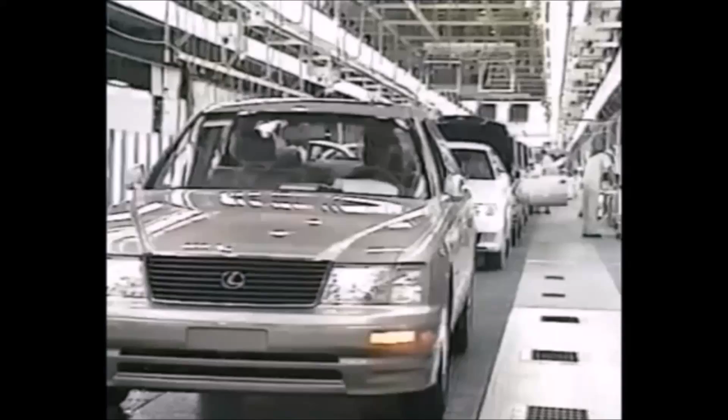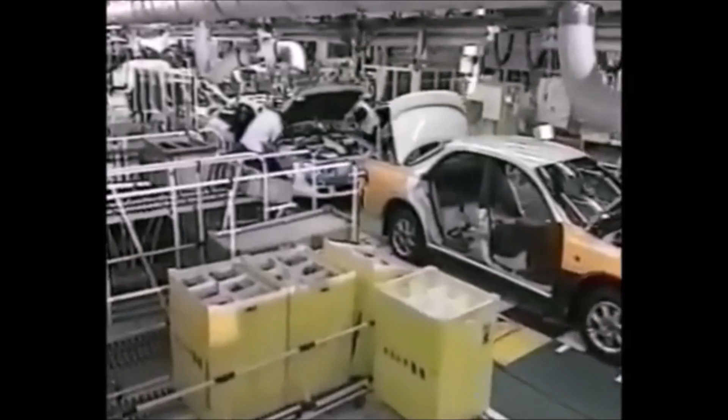Consistently crafted cars roll off the assembly line in a smooth flow. They are alive with the spirit of providing people with quality products through conscientious manufacturing and continuing research and development.

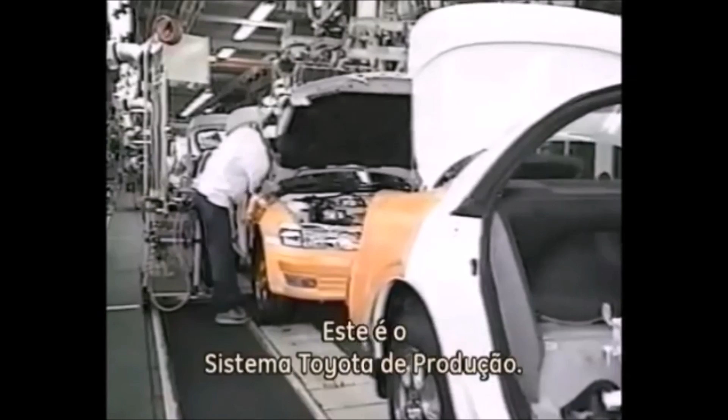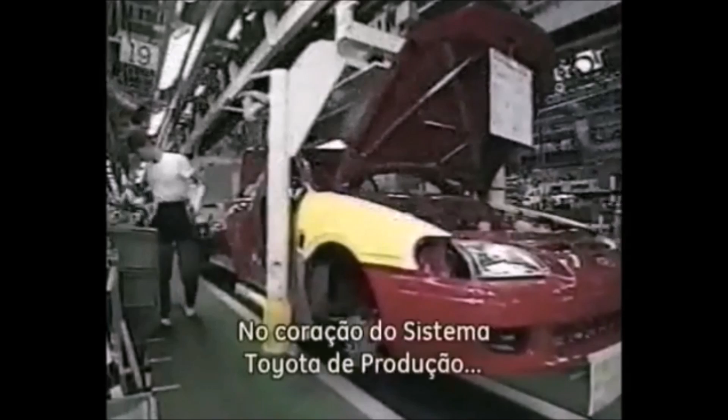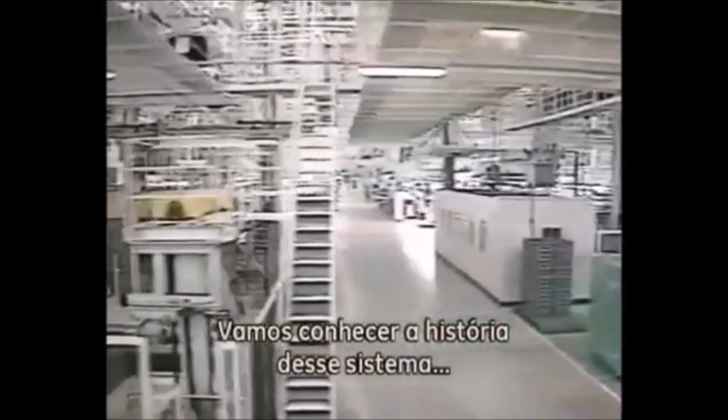This is the Toyota production system, where manufacturers eliminate waste to provide customers with well-made products in a timely manner. At the heart of the Toyota production system are the concepts of intelligent automation and just-in-time manufacturing. Let's explore the history of that system, which has transformed manufacturing around the world.

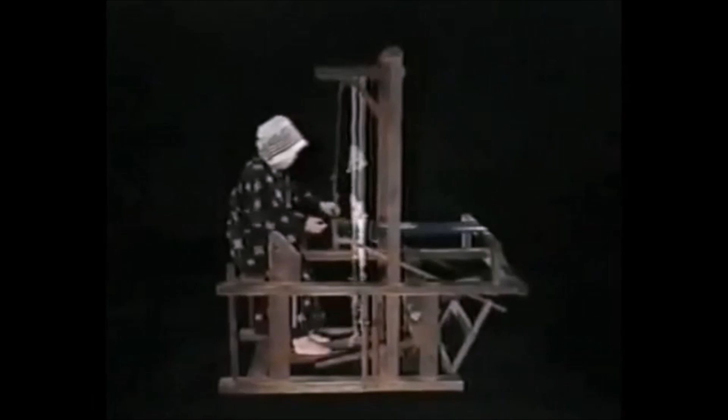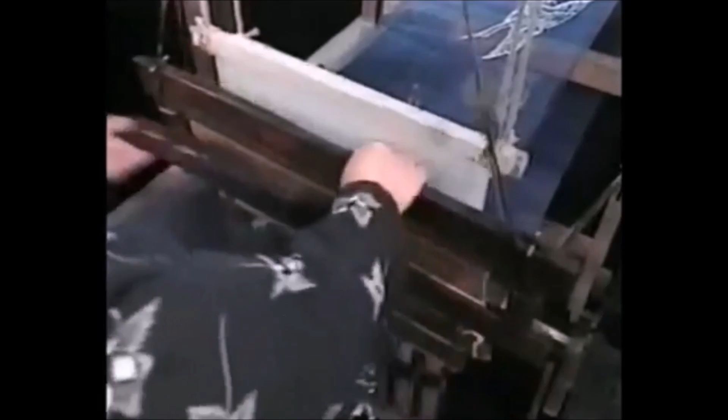The concept of intelligent automation, called jidoka, originated in looms invented by Sakichi Toyoda, the founder of the Toyota Group. Weaving traditionally had been a very manual kind of work. The weaver fed the horizontal yarn back and forth between the vertical yarns. Sakichi had watched his mother working at a manual loom and thought of ways to make weaving easier.

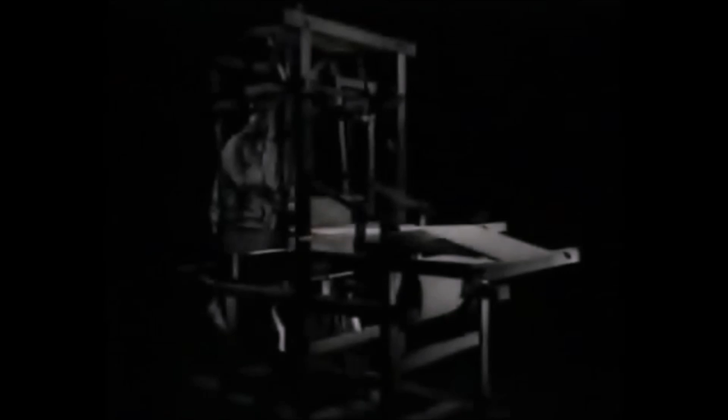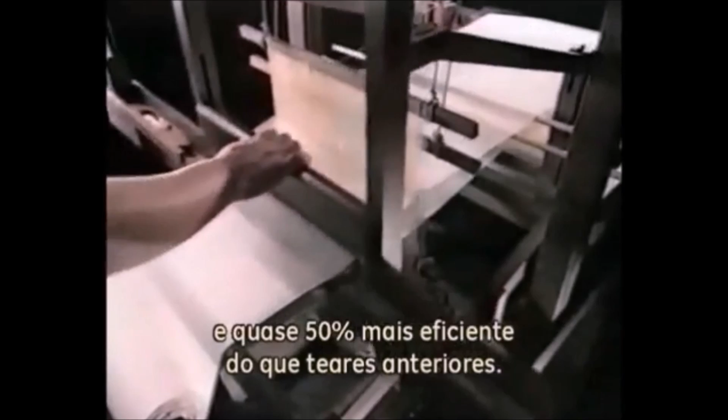He invented an original wooden hand loom in 1890. His loom was easy to use and nearly 50% more efficient than previous looms. The operator could move the yarn guide back and forth with one hand and feed in the horizontal yarn simultaneously.

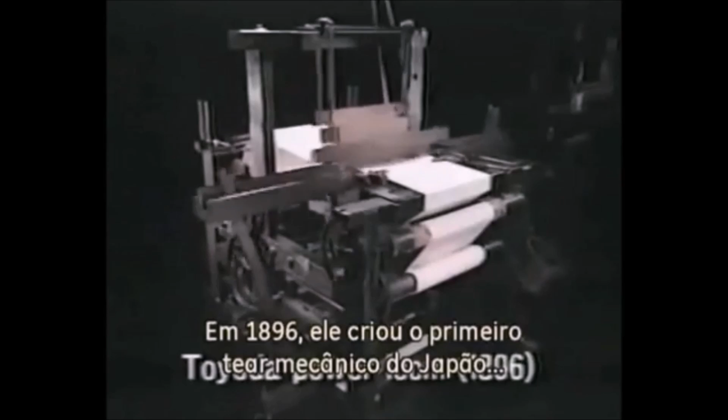Sakichi then went to work on power looms. In 1896, he created Japan's first power loom, and he continued making one improvement after another.

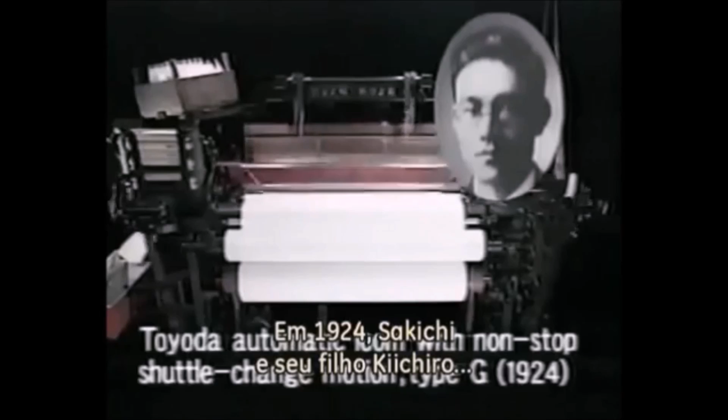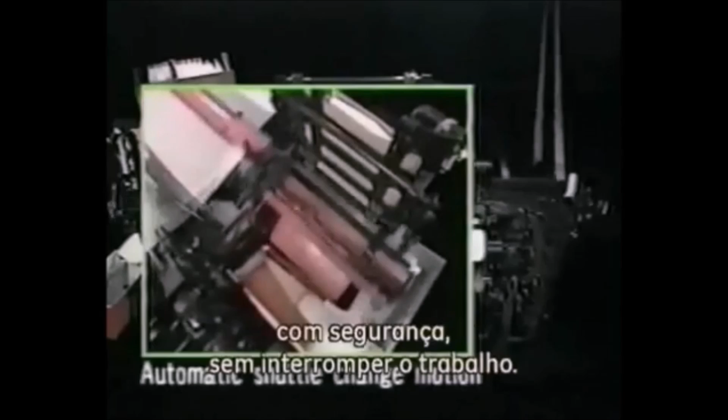In 1924, Sakichi and his son Kiichiro achieved a historic breakthrough. They created the world's first high-speed loom that fed in new weft, the horizontal yarn, reliably without interrupting work. Let's take a look at a feature of their breakthrough non-stop loom, the Model G.

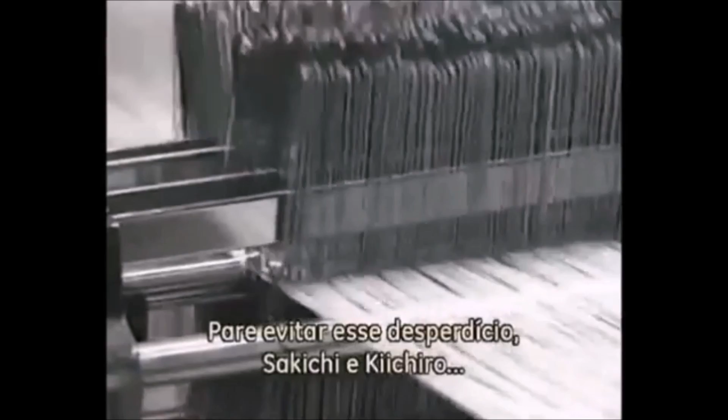Traditional looms wasted material on fabric like this when one of the vertical warp yarns snapped, as often happened. To prevent that waste, Sakichi and Kiichiro arranged thin metal floaters over the vertical yarns. A floater would slip down and stop the loom if its yarn snapped.

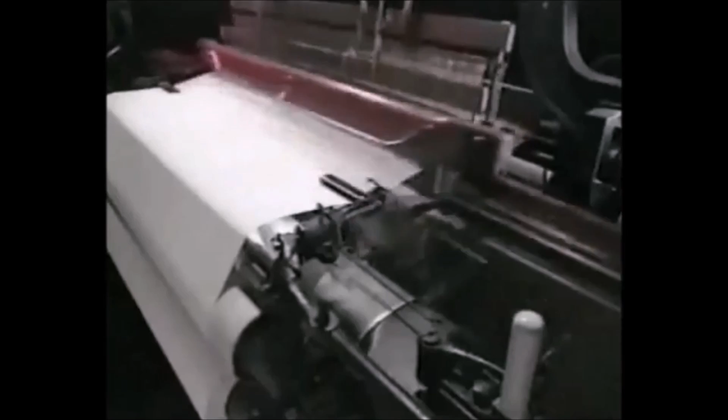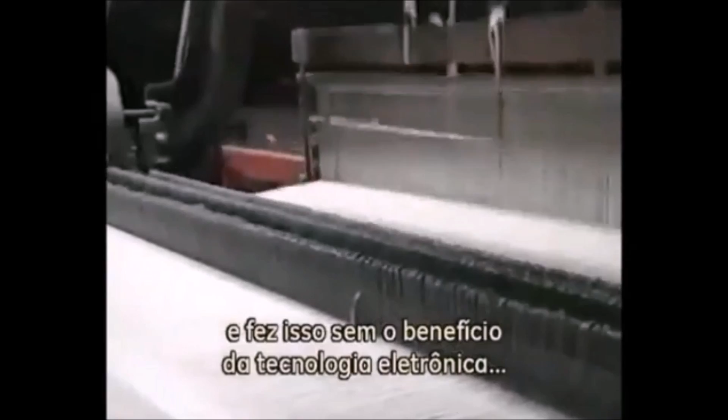These automatic stop innovations for preventing waste were absolutely remarkable. Sakichi had created sophisticated sensors, and he had done that without the benefit of the electronic and optical technology we now take for granted.

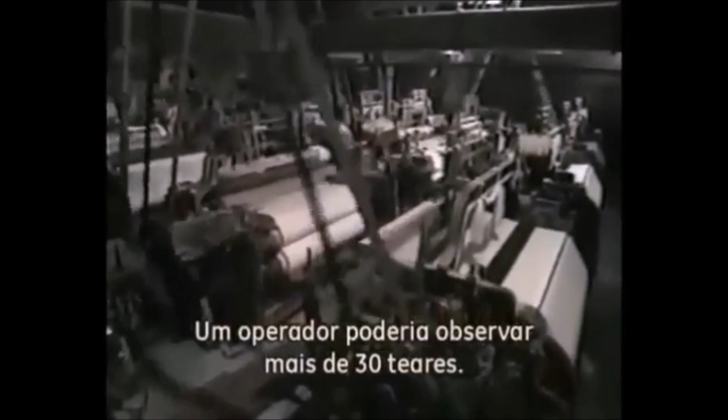His innovations eliminated the need for an operator to watch over each loom continuously. One operator could oversee more than 30 looms. The Model G captured a great deal of attention in Europe and the United States.

So Sakichi's advances resulted in machines that would stop automatically if problems occurred, that would not produce defective work, and did not oblige people to serve as monitors.

The middle character in the Japanese word for automation, JIDOKA, is do, for movement. But Sakichi replaced that character with one that means value-added work. Note the additional element on the left side, which represents people. Sakichi's JIDOKA put the human element into automation.

The other core concept in the Toyota production system is just-in-time manufacturing. This concept originated in the ideas of Sakichi's son Kiichiro, who led Toyota into automobile manufacturing.

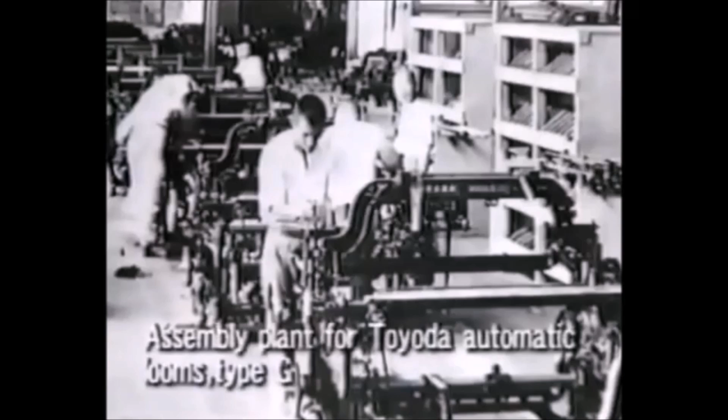Along with working with his father on the Model G loom, Kiichiro helped put in place a mass production system. He established Toyoda Automatic Loom Works in 1926 and introduced American assembly line methods to produce the Model G loom.

Kiichiro traveled to Europe and North America in 1929 to find licensees for his company's automatic loom technology. He was amazed at all the vehicles and roads in the United States, and he resolved to begin developing automobiles.

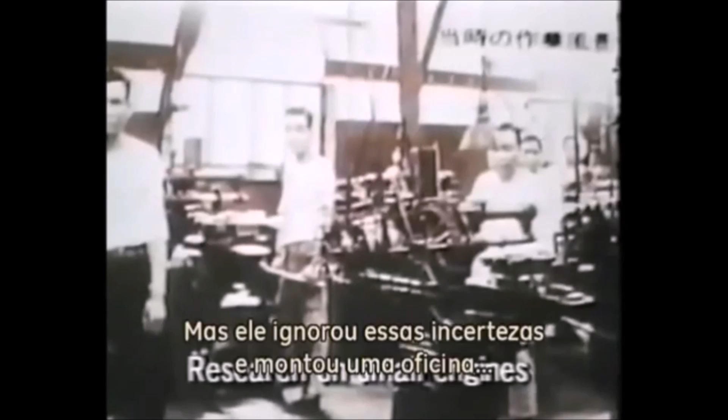People tried to dissuade Kiichiro. They said that Japan didn't have either the technology or the economic foundation for a viable car industry. But he ignored their doubts and set up a shop in a loom factory to develop small engines. He undertook the risk of investing in expensive precision equipment.

In 1935, his team created a passenger car prototype, the Toyota Model A1. In the following year, the first Toyota passenger car went into production as the Toyota Model AA. Kiichiro incorporated his automobile operations in 1937 and began work on a vehicle plant.

He refined American mass production methods for his plant and developed the beginnings of just-in-time manufacturing. The idea was to eliminate waste by making only what was needed, only when it was needed, and only in the amount needed.

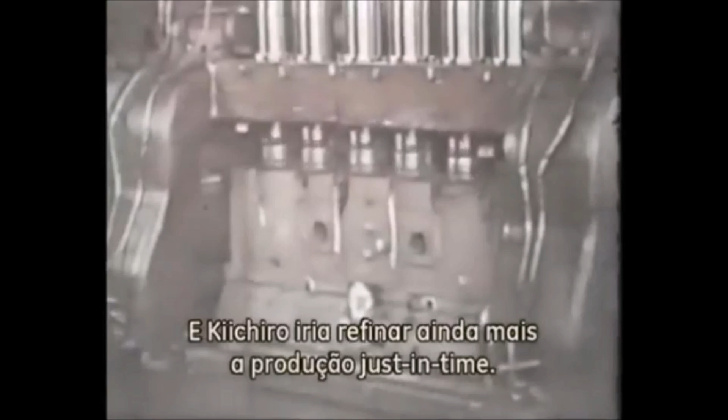Making quality cars of satisfactory performance required an all-out effort. And Kiichiro was moving to refine just-in-time manufacturing further, but the outbreak of World War II in 1941 interrupted his efforts.

After the war, Kiichiro passed on his dream to his cousin Eiji. He instructed Eiji to bring the company up to U.S. standards of technology within 3 years.

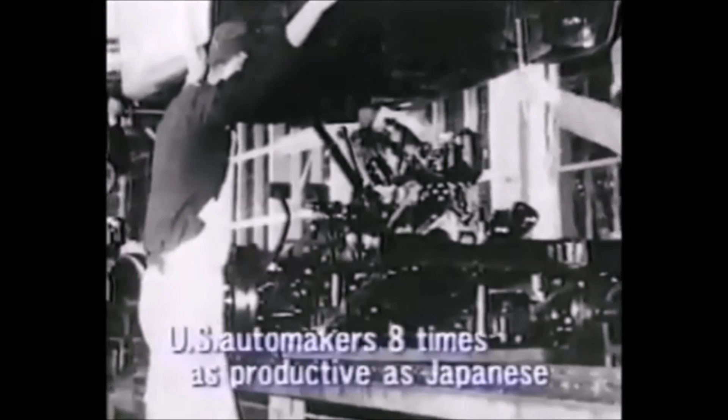That was a daunting task. U.S. productivity in automobile manufacturing was 8 times higher than Japan's, and Toyota was short of equipment and capital. So raising productivity was a pressing issue. Eiji assigned a machine shop manager by the name of Taiichi Ohno to develop a more efficient production system.

The two men looked for ways to raise the value-added productivity of every worker. They did that by putting Sakichi's JIDOKA concept to work throughout their operations. They also looked for other ways to stretch their limited resources of equipment and capital, by putting Kiichiro's just-in-time concept to work systematically.

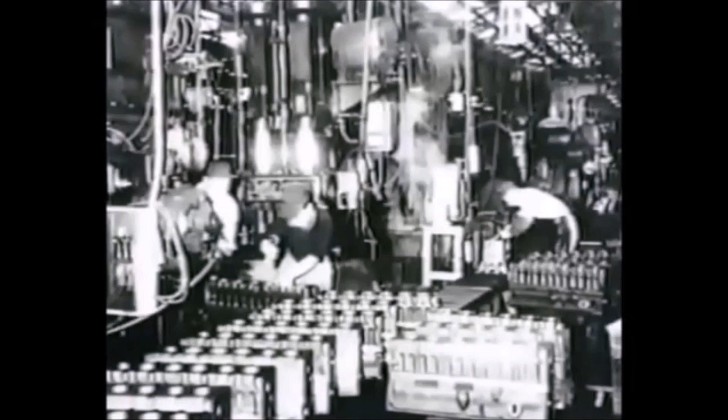Ono took a cue from the U.S. supermarket. He made each process the customer for the preceding process.

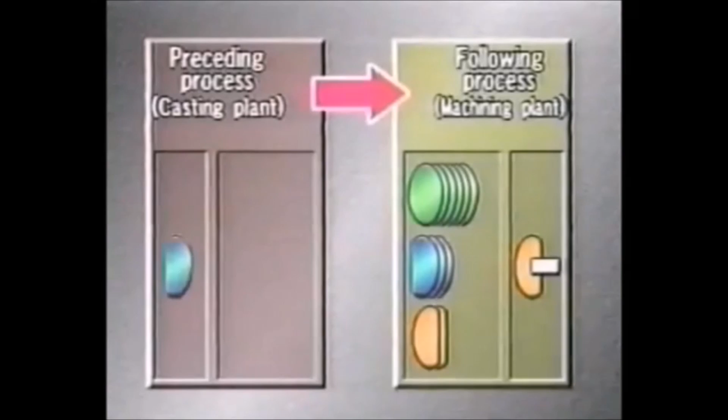In traditional manufacturing, processes delivered parts to the following processes regardless of what was actually needed.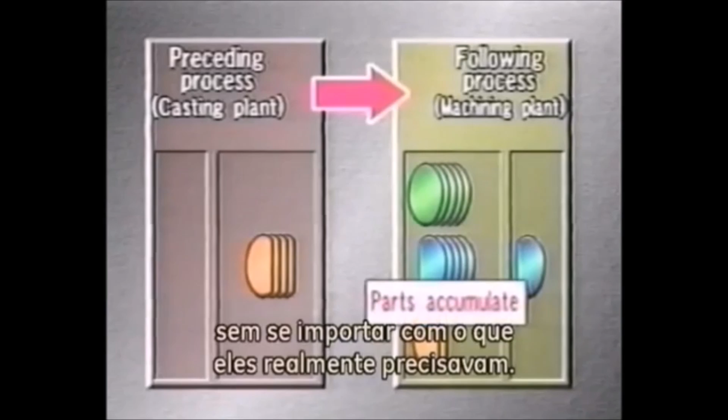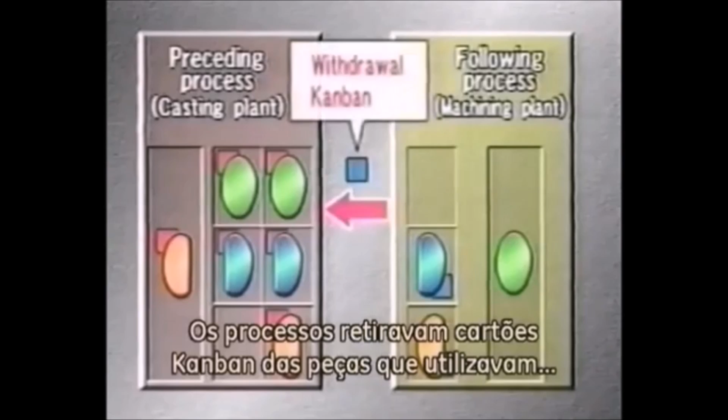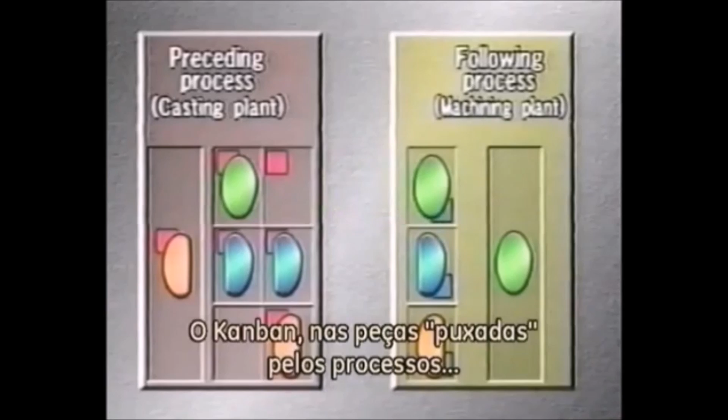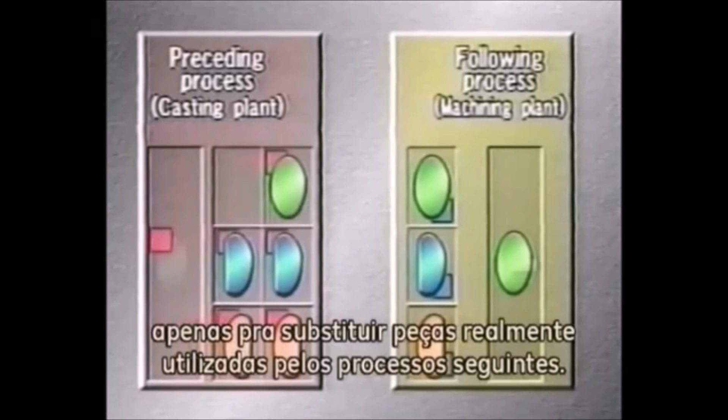Ono devised a completely new kind of system. Processes used Kanban cards removed from parts they had consumed to withdraw parts from the preceding processes. Kanban on the parts arrayed by processes came off when the following processes withdrew the parts. They became instructions to make additional parts. The Kanban flow ensured that processes made parts only to replace parts actually consumed by the following processes.

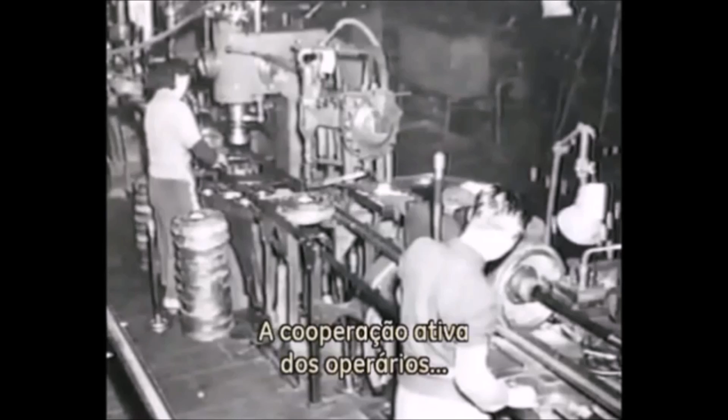Active cooperation by the people in the workplace would be essential to Ono's system. But at first, people were reluctant to give up their old ways of doing things. Ono took the initiative. He went into the workplace and taught people how to use his system.

Eiji Toyoda supported Ono enthusiastically in putting the new production system in place. A new production system gradually took shape on the foundation of just-in-time manufacturing and JIDOKA intelligent automation. As the Toyota production system, it became a standard for manufacturing industries.

The Toyota production system gained global attention after the oil crisis of 1973. Toyota recovered more quickly than other automakers from the crisis, and its production system received much of the credit for that resilience.

General Motors Corporation approached Toyota about setting up a joint venture to make small cars in the United States. The two companies set up New United Motor Manufacturing Incorporated in California in 1984.

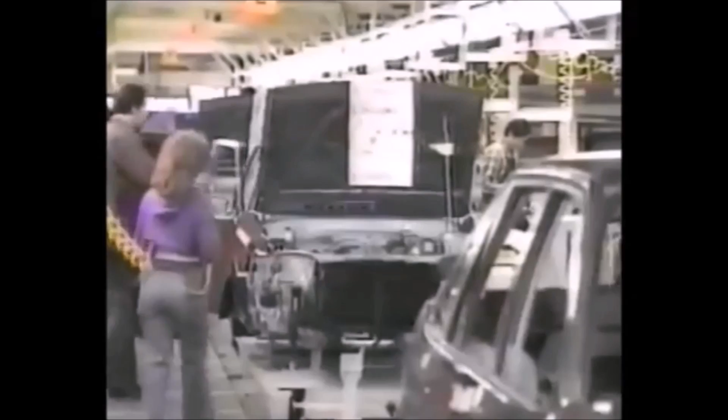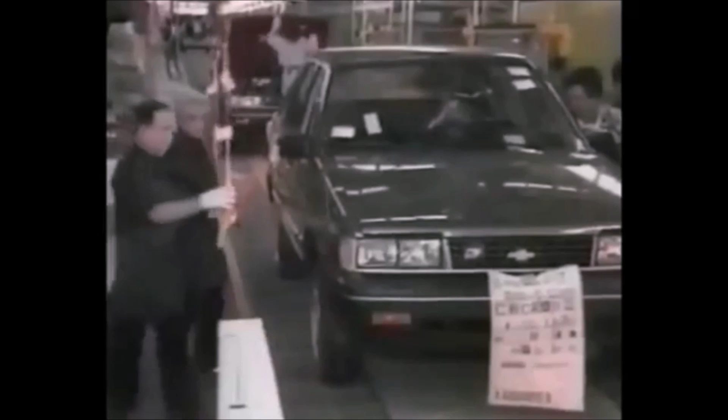Differences in language and culture presented big challenges, but the spirit of making things well knows no borders. People accepted the Toyota production system, and the Toyota-GM joint venture became the highest-ranked automobile plant in the United States for quality. It became a symbol of successful industrial cooperation between Japan and the United States.

A book published by the Massachusetts Institute of Technology hailed the Toyota production system as the machine that changed the world.

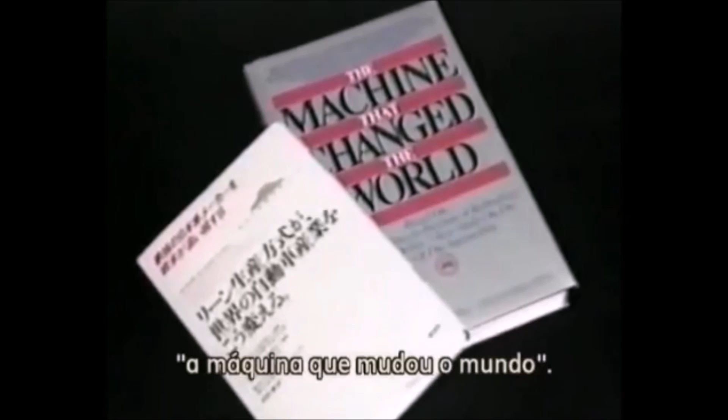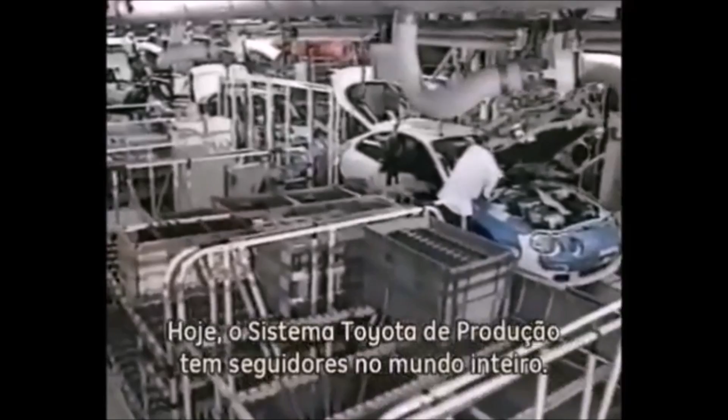Today, the Toyota production system has gained a worldwide following. Let's see how the system now operates in the world's most modern automobile plants.

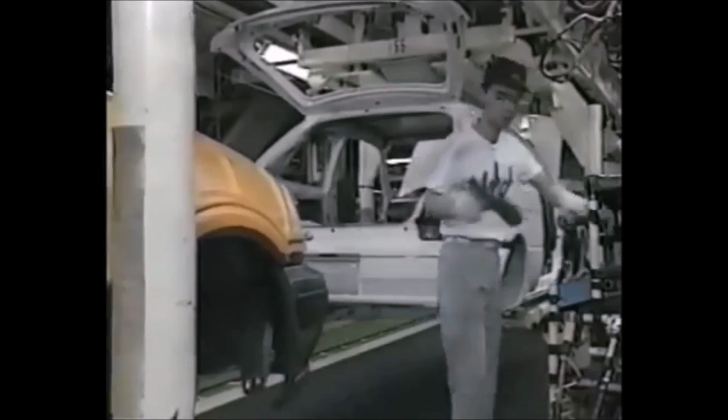The trucks that deliver parts to the plants carry a variety of items in each load. That allows each truck to travel fully loaded, which minimizes trips and thus reduces traffic congestion.

Forklifts carry the parts unloaded from the delivery trucks to racks alongside the assembly lines.

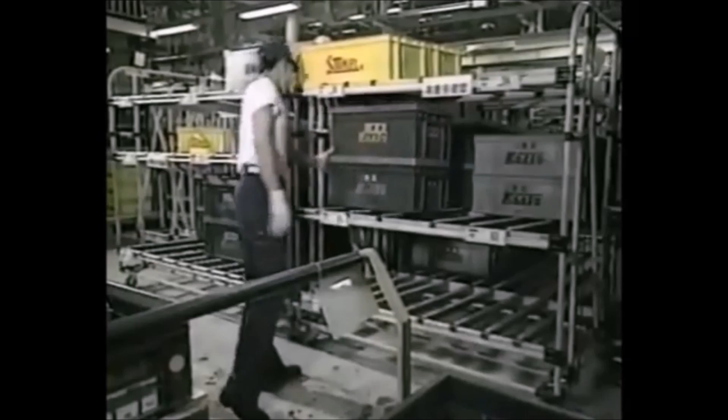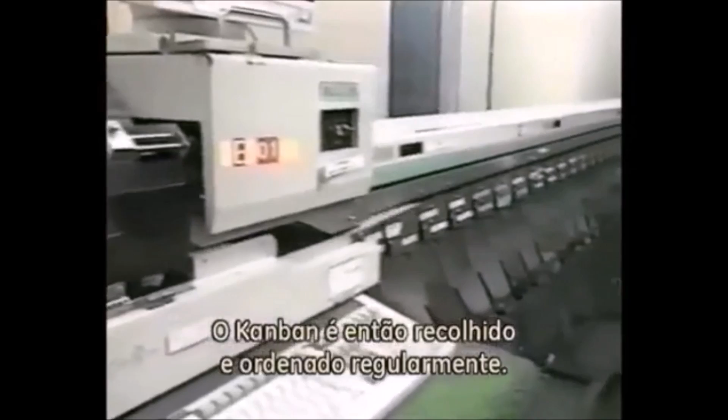When people on the assembly line use the parts, they remove the attached Kanban cards. The Kanban get picked up regularly and sorted. The delivery truck drivers pick up the Kanban for their company or companies before leaving.

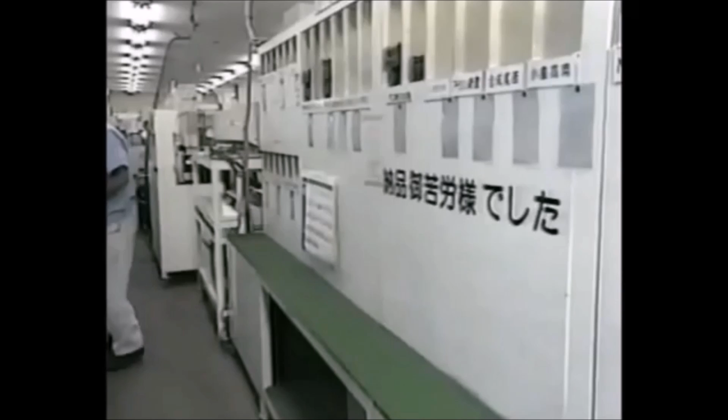Back at the supplier's plants, the Kanban become orders for withdrawing additional parts. Sorting arranges the Kanban according to area in the plant. Shipping personnel exchange the Kanban and empty boxes for full boxes.

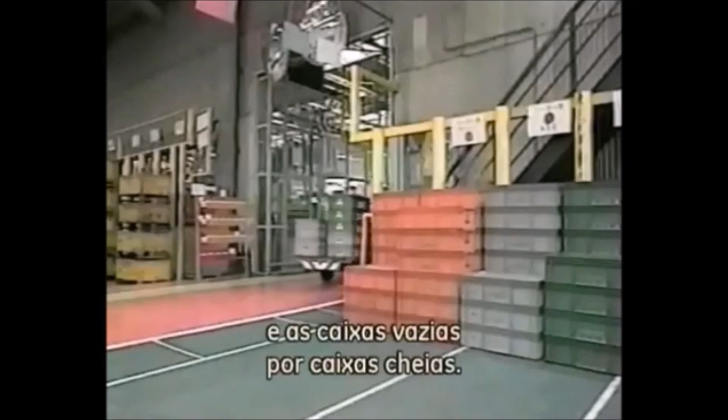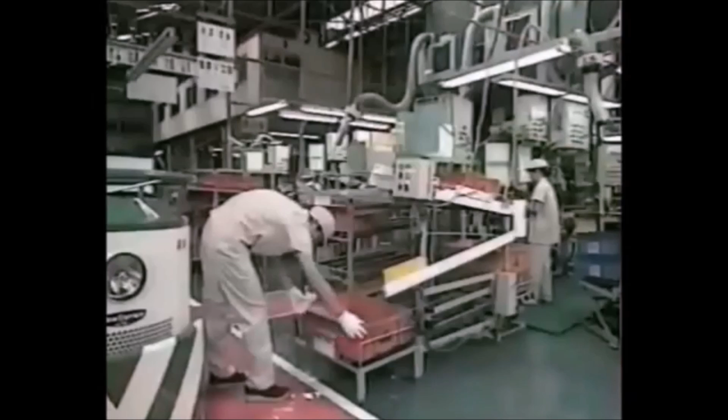The production processes in the plant make additional parts only to replace parts that have been withdrawn. That prevents the wasteful buildup of inventories.

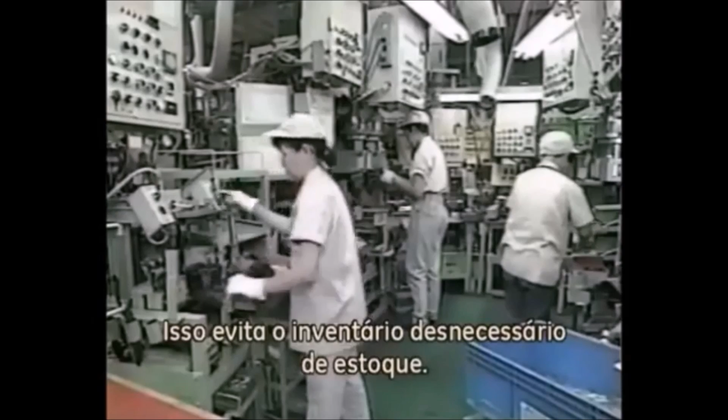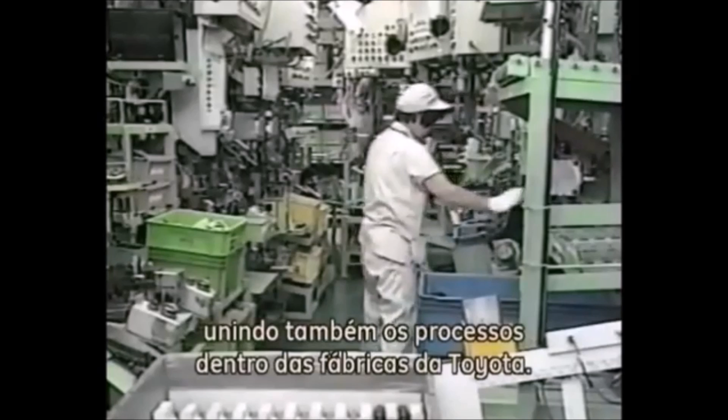When the shipping personnel have gathered a full truckload of parts, a truck carries the parts to the vehicle plant. Kanban thus link Toyota plants with suppliers' plants, as well as linking the processes inside the Toyota plants. Just-in-time manufacturing minimizes inventories, eliminates waste, and maximizes productivity at all the plants that participate in the Toyota production system.

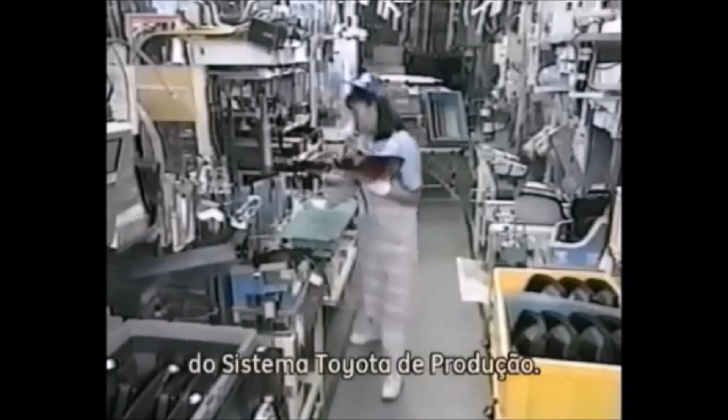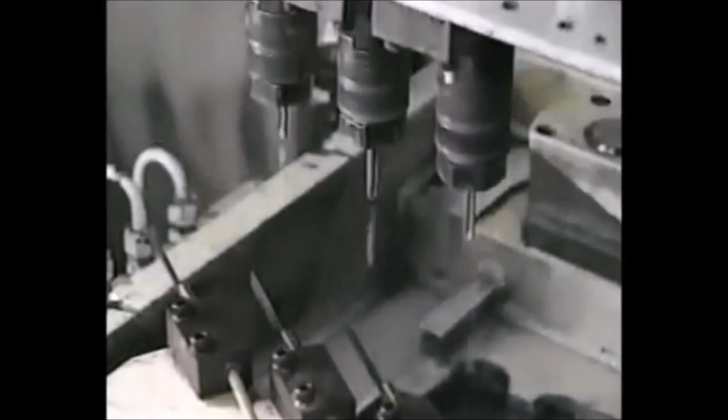JIDOKA Intelligent Automation also continues to play a big role in the system. On automated machining lines, andon lamps light up to call attention immediately to any problems detected by sensors.

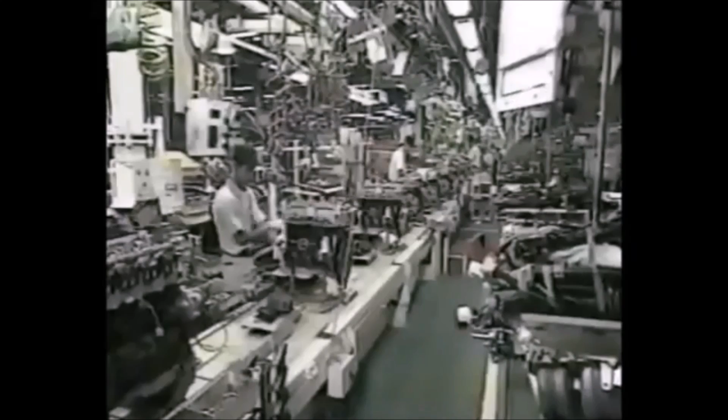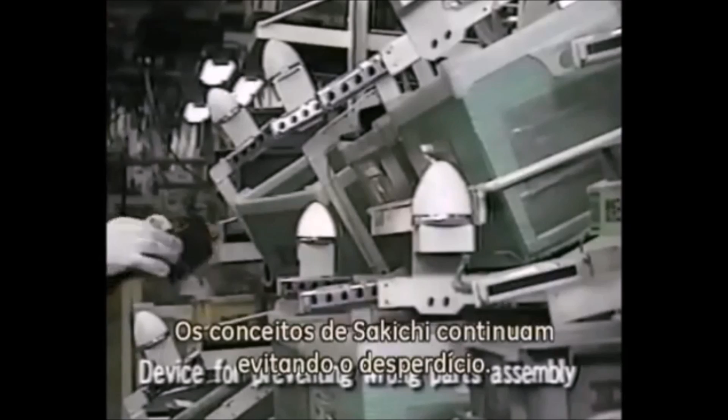On assembly lines, the employees themselves have devised countless JIDOKA measures to prevent defective work. So Sakichi's concept continues to prevent waste. The idea is to build quality assurance into every process, and it works.

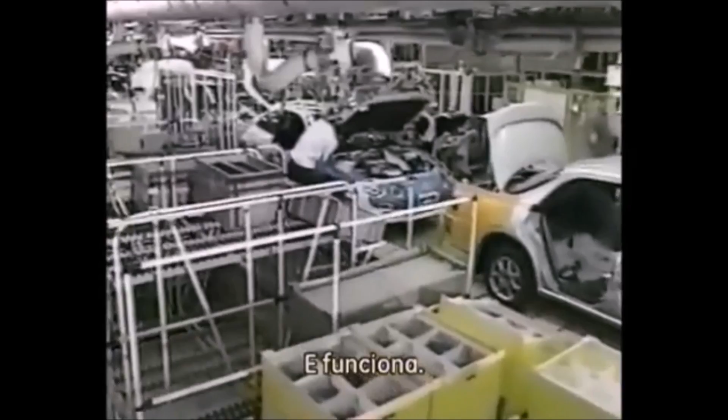The foundation for the Toyota production system has been established by Sakichi's JIDOKA Intelligent Automation and his son Kiichiro's just-in-time manufacturing.

Taiichi Ohno and others put those concepts to work systematically with the strong support of Eiji Toyoda and his passion for manufacturing.

The Toyota production system continues to evolve in response to changing needs and circumstances, but the fundamental concepts are eternal, including Toyota's commitment to continuing improvement in every phase of products and operations. Those concepts underlie a lasting contribution to enhancing the quality of life for people everywhere.